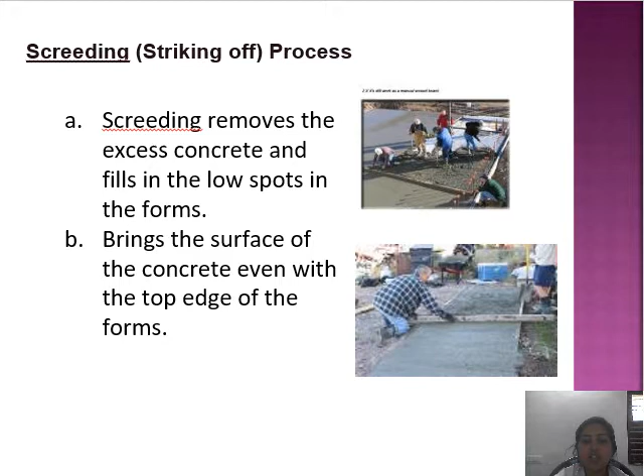Screeding means striking off the excess concrete. Screeding removes the excess concrete and fills in the low spots in the forms, bringing the surface of the concrete even with the top edge of the forms. We place a board across the edge of the form and make a back and forth movement, so that the concrete can be spread uniformly throughout the span.

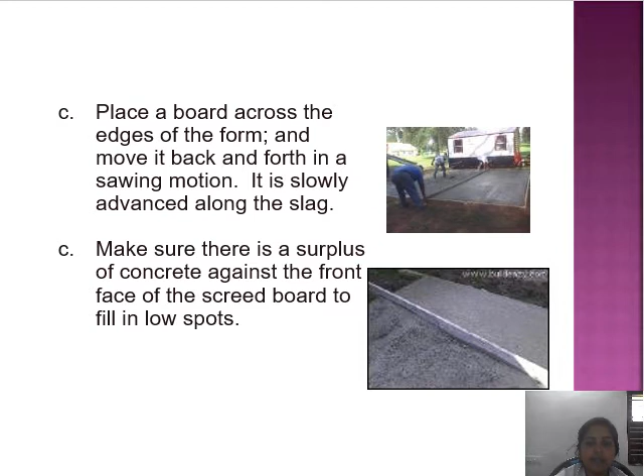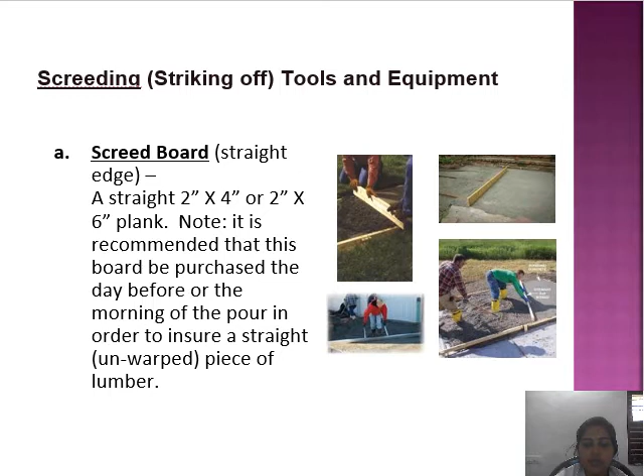Screeding tools and equipment: a plank is used, of size 2 inch by 4 inch or 2 inch by 6 inch. A power screed is also used for large jobs.

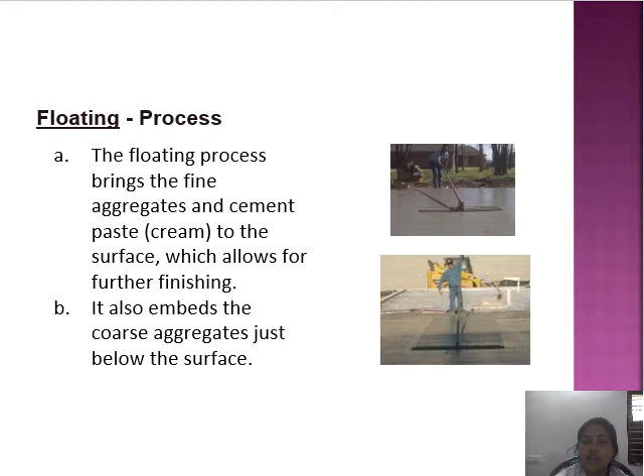Next is the floating process. Finishing by floating brings the fine aggregates and cement paste to the surface, which allows for further finishing. It also embeds the coarse aggregate just below the surface. The voids left by the second screed board are filled. After that, a second screed board is taken and leveling takes place.

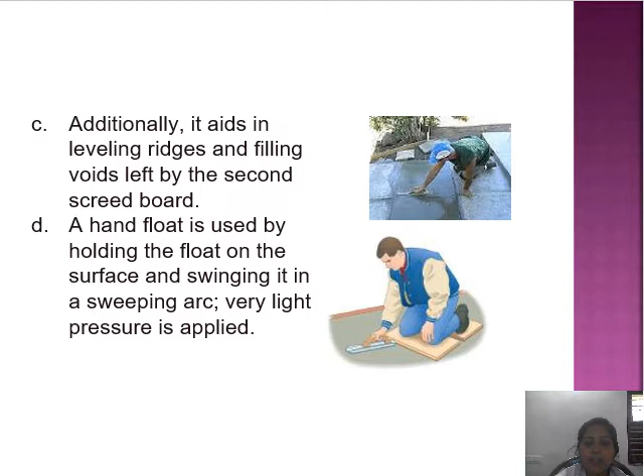Sometimes a hand float is also used, by holding the float on the surface and swinging it in a sweeping arc. Very light pressure is applied. These are the equipment for concrete floating. A float is made of wood, aluminium, or magnesium. It consists of a rectangular base of wood or metal with a handle attached, and the edges of the base are chamfered. Hand floats are used mostly for small jobs and outside edges.

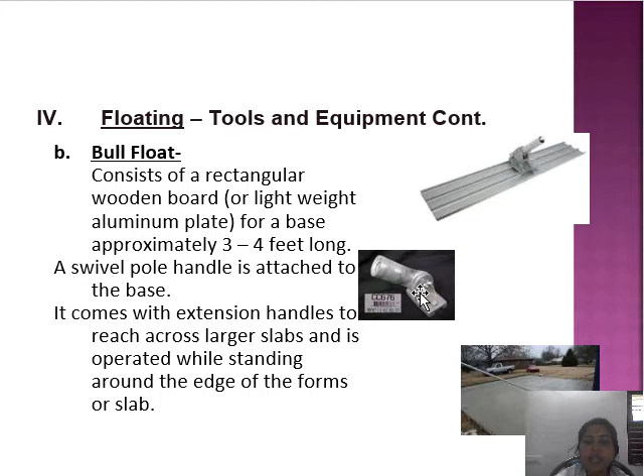Next, the bull float is also used. This is the type of bull float. It has a rectangular wooden board for a base, approximately 3 to 4 feet long. Then the next step is the brooming process. Brooming is used if a rougher finish is required than floating, and it is done after the second floating operation.

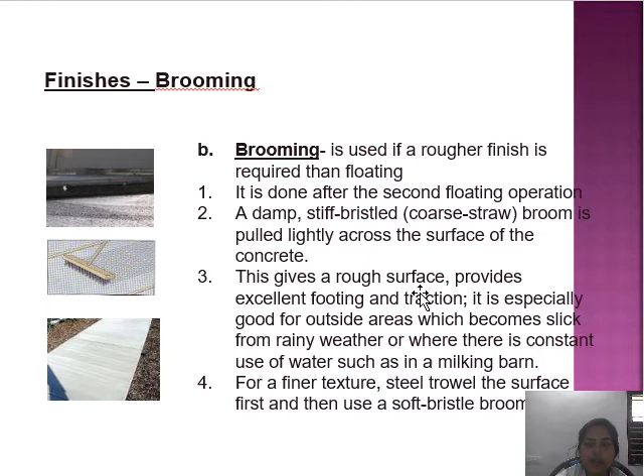It is especially good for outside areas which become slippery from rainy weather or constant use of water. Brooming is done after the floating process and is used if a rougher finish is required than floating. Brooming is sometimes required only if we need a rough surface; then only will brooming be done.

Sometimes the troweling process is done directly. Troweling produces a smooth, hard surface, since the action brings the cement paste to the surface. It is done immediately after floating, when the surface is semi-hard. A troweled surface allows for easy cleanup and is ideal for sanitary conditions. However, it is extremely slippery when wet. It is completed with a steel hand trowel.

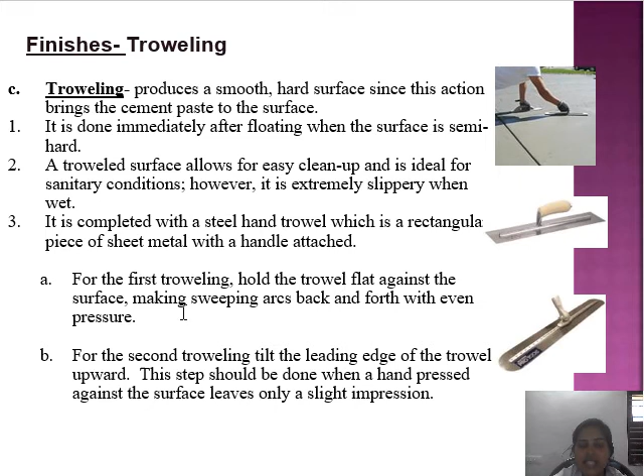The hand trowel is a rectangular piece of sheet metal with a handle attached. This is the trowel, and with its width they will do the finishing. For the first troweling, hold the trowel flat against the surface and make sweeping arcs back and forth. A power trowel is also available, and troweling can be done with its help as well.

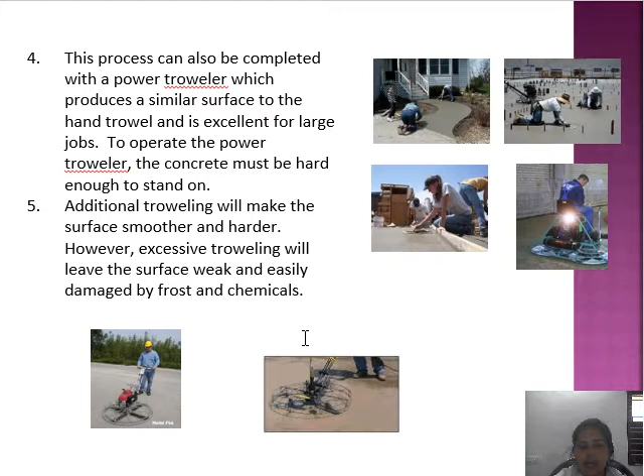The next step is the curing process. Curing is a very important process. It is keeping the concrete damp for the required number of days in order to enable the concrete to gain more strength. Only after completing all these processes will it gain strength. Keeping the concrete in a damp, that is wet, condition for the required number of days to acquire strength is known as curing.

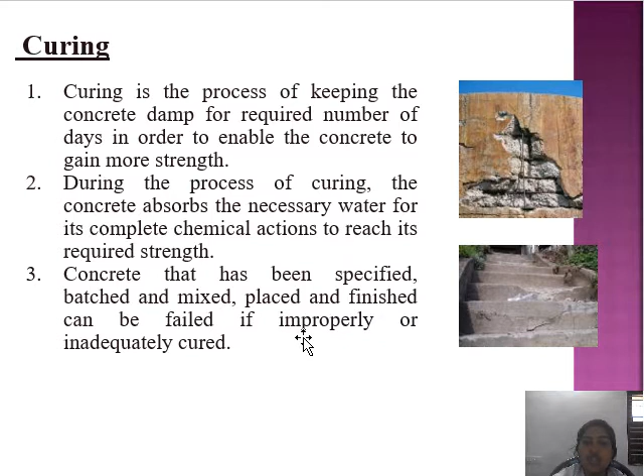In the curing process, the concrete absorbs the necessary water for its complete chemical action to reach its required strength. If it is improperly cured, the strength will not be gained. It is the last step in the concrete project and influences the durability, strength, water tightness, and wear resistance to freezing and thawing conditions. In cold weather conditions, the concrete should be cured for at least 14 days. If you are using Portland cement, the curing period is about 7 to 14 days.

If rapid hardening cement is used, the curing period can be considerably reduced. So mostly this period of curing depends upon the type of cement and atmospheric conditions, that is temperature, humidity, wind velocity, etc. So why do we want to cure this concrete?

To gain strength and to improve the durability, serviceability, as well as the microstructure of the concrete. The right time to cure concrete is once it is placed and within 30 minutes the initial setting time takes place. After final setting, curing is required as per selected practice.

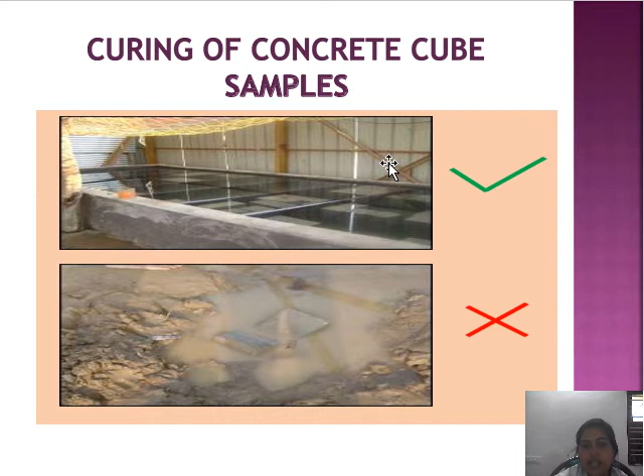So, curing of concrete cube samples. In the lab we have to cure the concrete samples like in this manner or not in this manner. There are types of curing.

The first one is the ponding method. Concrete for flat surfaces such as pavements, sidewalks and slabs can be cured by ponding. Ponding is done by constructing a pond-type structure with the help of sand or concrete, and they sprinkle the water. This is undesirable if the concrete will be exposed to early freezing.

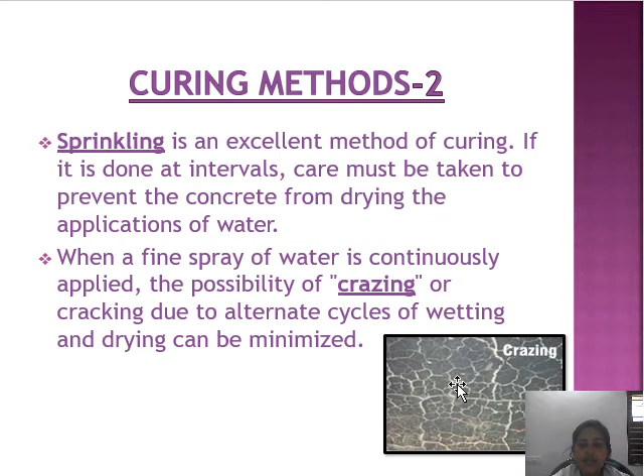Sprinkling is an excellent method of curing. If it is done at intervals, care must be taken to prevent the concrete from drying between applications of water. When a fine spray of water is continuously applied, the possibility of crazing or cracking due to alternate cycles of wetting and drying can be minimized. So there is sprinkling of water for curing.

Automatic sprinkler method is also there. Wet covering means they use cotton mats, burlaps, or other moisture-retaining fabrics or sacks for covering. Wet coverings of earth or sand are also effective for curing. They use moist straw or moist earth to cover the concrete, with the main aim of imparting dampness to keep the concrete in a damp condition.

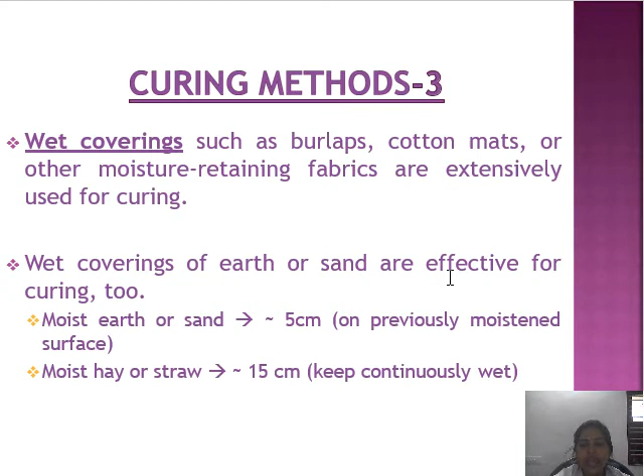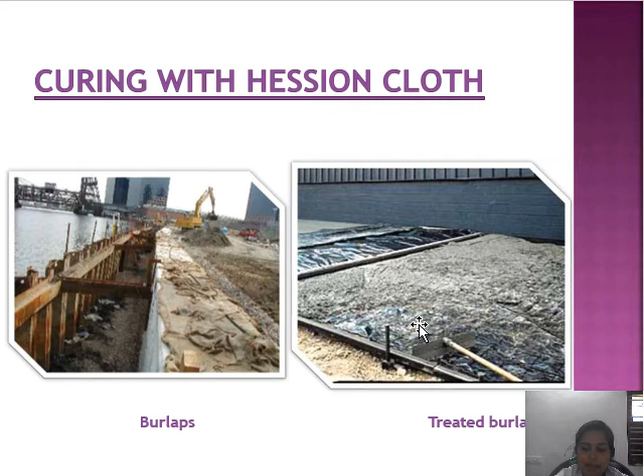So curing with the Hessian cloth - here they are curing the concrete with the Hessian cloth. This is with treated burlap, a type of material.

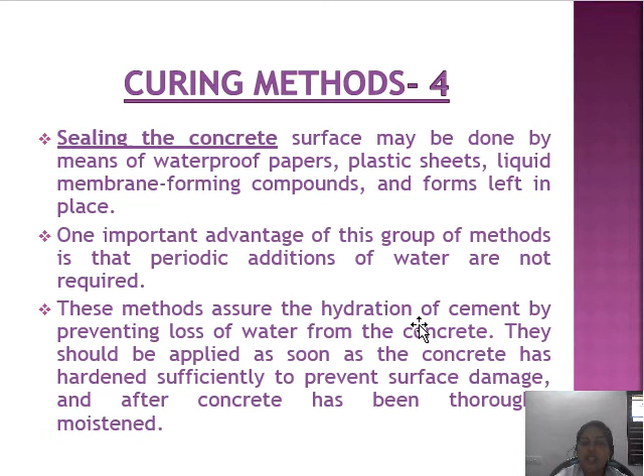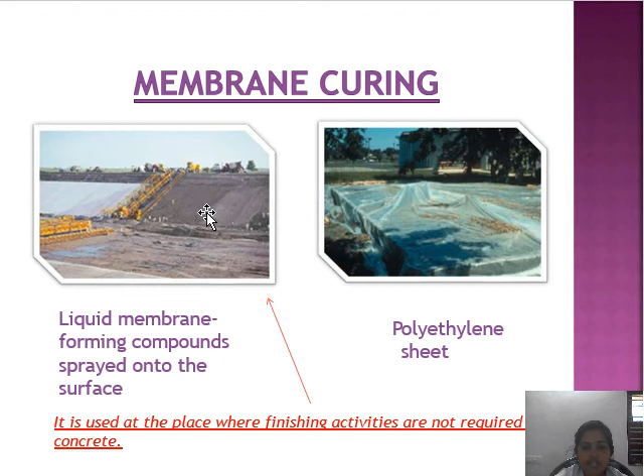Next, sealing the concrete surface may be done by means of waterproof papers, plastic sheets, liquid membrane-forming compounds, and forms left in place. The main advantage of this group of methods is that periodic additions of water are not required. This is membrane curing, where membrane-forming compounds are sprayed on the surface, or a polythene sheet is used.

Steam curing can be used to advantage for early strength gain in concrete. If you want strength gain in earlier days, steam curing is required, and it is mostly used in cold weather concreting. There are two methods of steam curing: curing in live steam at atmospheric pressure, and curing in high-pressure steam autoclaves.

Autoclaves are used in labs for small manufactured units. At atmospheric pressure, this is for cast-in-place structures as well as manufacturing precast units. Precast units means we cast the concrete, such as slabs, in a manufacturing unit and transport it to the site. For that purpose, we need this type of steam curing.

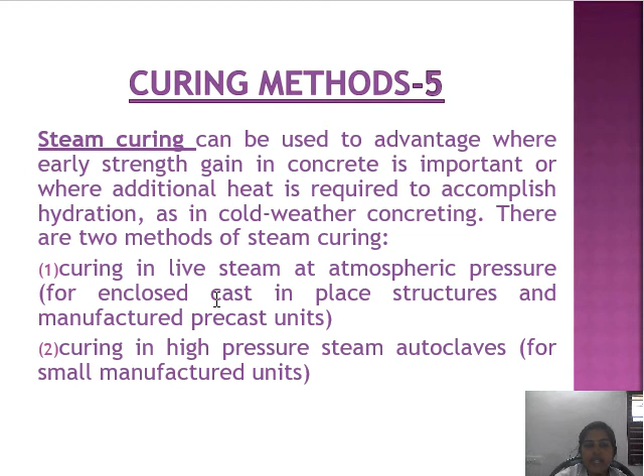The steam curing cycle consists of an initial delay, then a period for increasing temperature.

Then there's water-based concrete curing compound, formulated from hydrocarbon resins, which is added as a curing compound. It may be used on interior, exterior, vertical and horizontal concrete surfaces. Once applied, it forms a liquid membrane that retains an optimum amount of water present in freshly placed concrete to allow complete hydration of the cement. Because of this compound, it retains the dampness that is required.

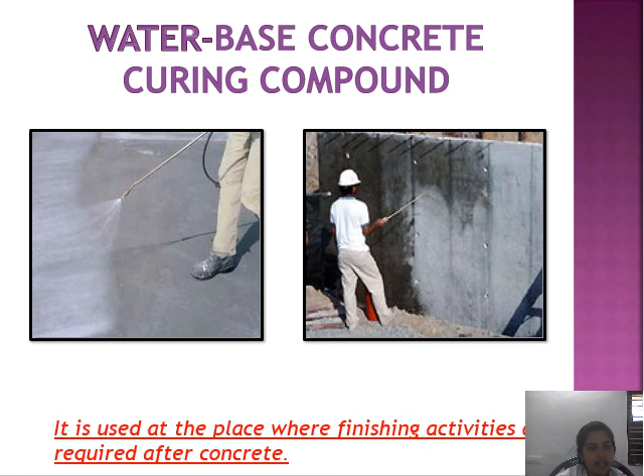Because this method is costly, we mostly use common methods. For constructing ordinary buildings or houses, they will be using the ponding method only, for small structures.

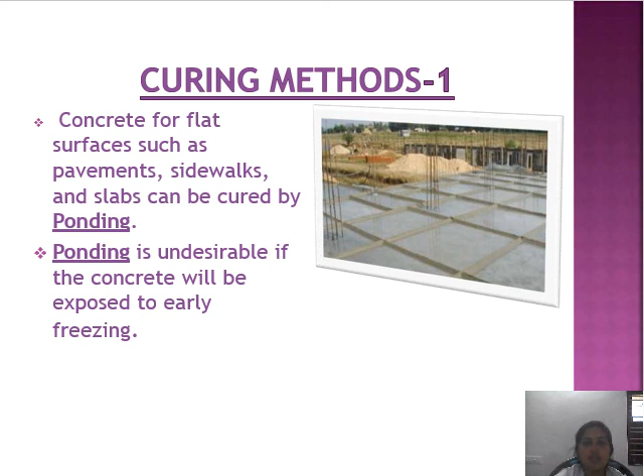So this is all about the manufacture of concrete - the final steps being finishing and curing of concrete. The process of manufacturing concrete includes: first, batching of concrete; second, mixing; third, transporting; fourth, placing and compaction; and finally, finishing and curing of concrete.

So this is all about the manufacture of concrete. Thank you.